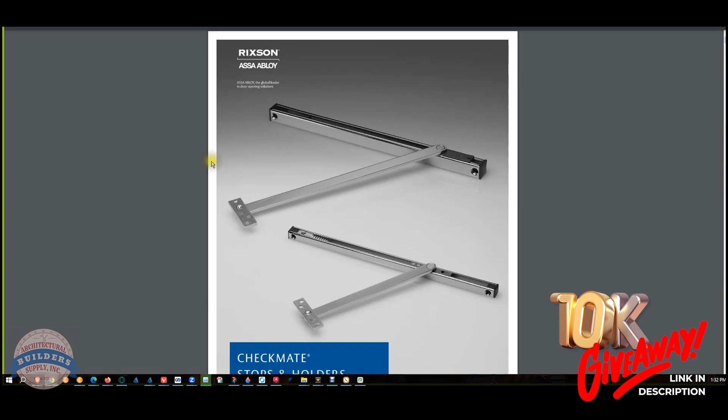Oh, awesome. So, do you want to talk about electromagnetic door holders? Is that what it is? Yeah, that's what I was thinking. Okay. Well, I see these most often in hospitals, and I always think of Rixson for these, but there are many other people that make these. And the Rixson catalog is a really good weather vane, so to speak, because it has not only all of the typical culprits, but it's going to have stuff that you may not find by other people.

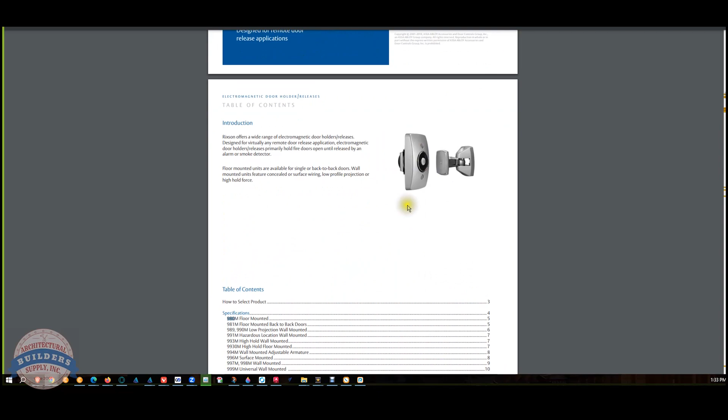So in the Rixson catalog, which is the Rixson manufacturer's page, and then the 2018 full line catalog. Okay, I know them there. We fire that up, 45th page. Here we go. Hager and Rixson and ABH and so many people make these. So when it comes to this stuff, I'm really looking to sell something that's more economical in the sense that this Rixson material is really expensive. There are other people like RSG that make this stuff, and it's not nearly as costly.

So the important application for this material is when you have the requirement of holding a door open, and it has to be connected to the fire panel or some sort of an input, like an ionization detector, like a smoke detector. I've done these where I sold the client a smoke detector, and it was code compliant for what they were doing. A typical electromagnetic door holder is going to be installed, and then there'll be a relay at the fire alarm panel. So if that circuit opens, it's going to cut the power to this, and the dumb mechanical closers are going to do the job of getting the doors closed.

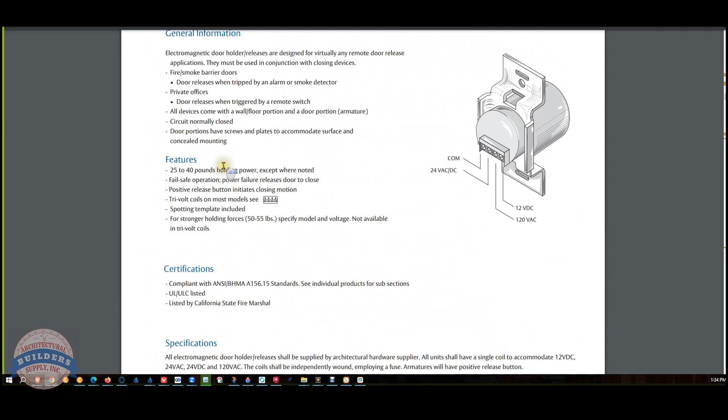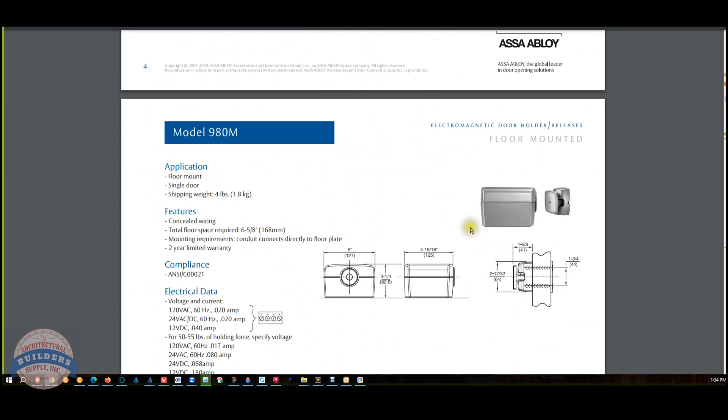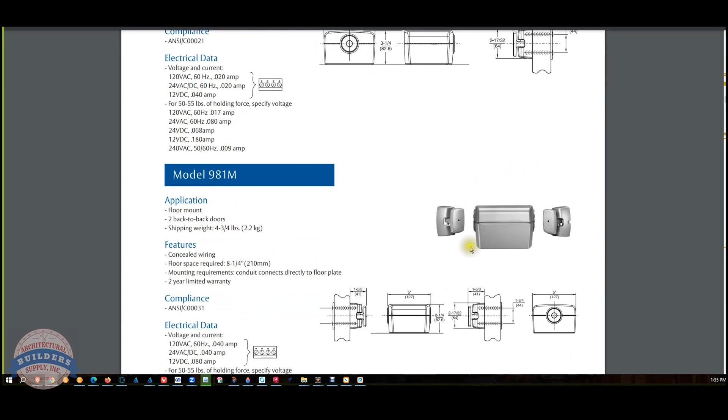And these are really elegant in the sense that they hold the door open. That's all they do. When we look at the catalog, and these part numbers have changed over the years, what really changes it is where you're mounting it. It's almost always to the wall, except when it's floor mounted, like this 980M. The 981M can also be done as a pair of doors back to back. So if you have two pairs of doors, like 4 doors, you can hold those open in the center. But if you're doing these, you're really doing the wall mount stuff.

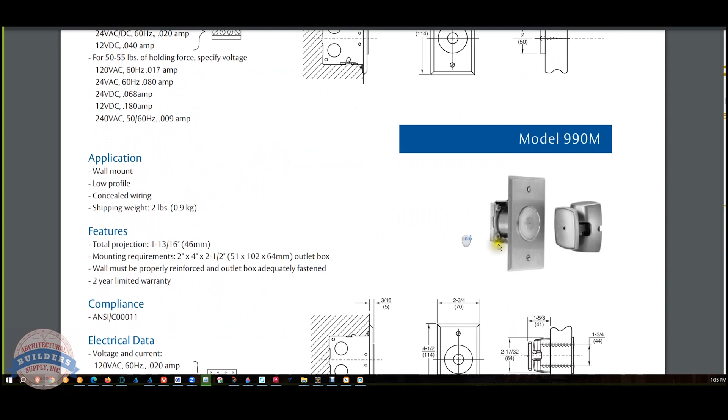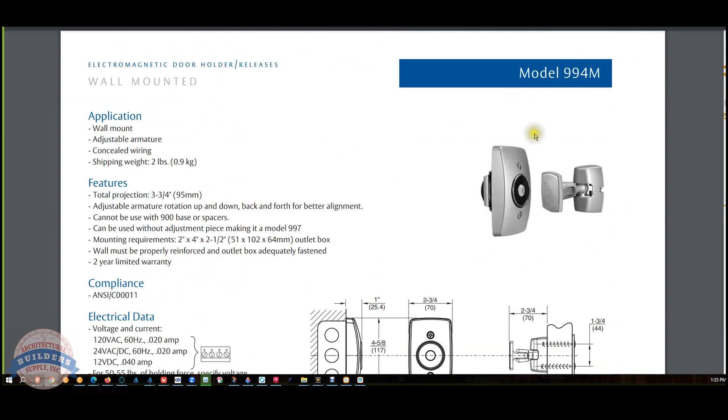So if it's wall mounted, really all that you're talking about is what's the projection off the face of the wall. That 989 is super small. You're looking at that versus something that's going to stick out much greater, like this 991 versus a 994M. That's 1 inch. Or one that has an extension, 2.5 inch on the 996. So when I think of these, I'm thinking about, are you installing it on the wall? And if yes, what projection do you need?

Because that actually really matters in the sense that you have to make sure that you can get the door to the armature. And the armature is going to be mounted generally to the door. Can you bring the armature mounted to the door to the magnet? I imagine that's where there's extensions.

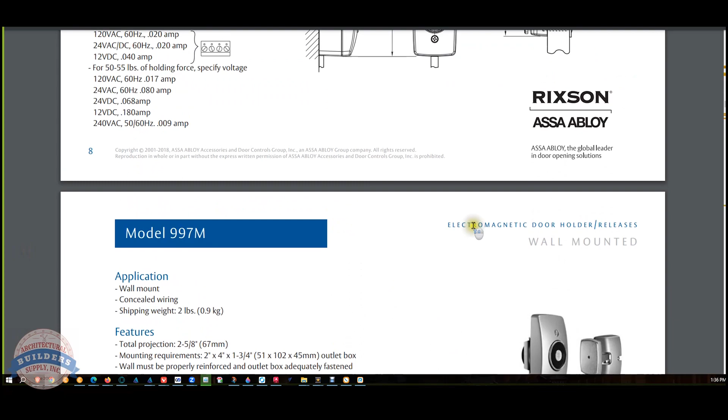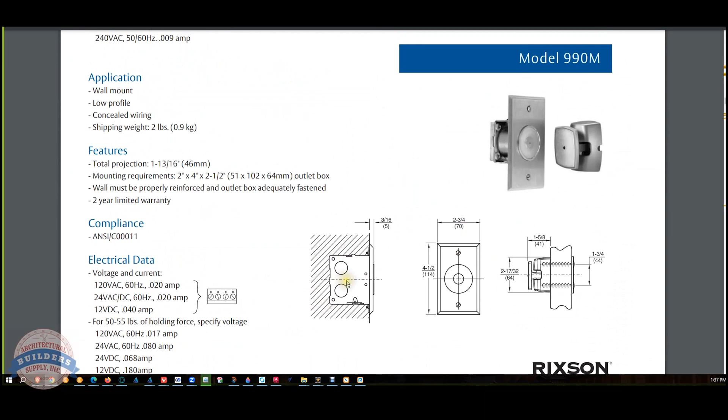Yeah, definitely. I had a conversation with a client, and he had a situation where it was really crucial that he could get the door to 90 degrees, and he had a tight perpendicular wall, and that projection became really important. It was a masonry wall, so he couldn't use anything that requires a box. So it had to be surface mounted. So this wouldn't have worked because he wasn't going to chop a hole in his masonry. Plus the wiring had to be surface mounted.

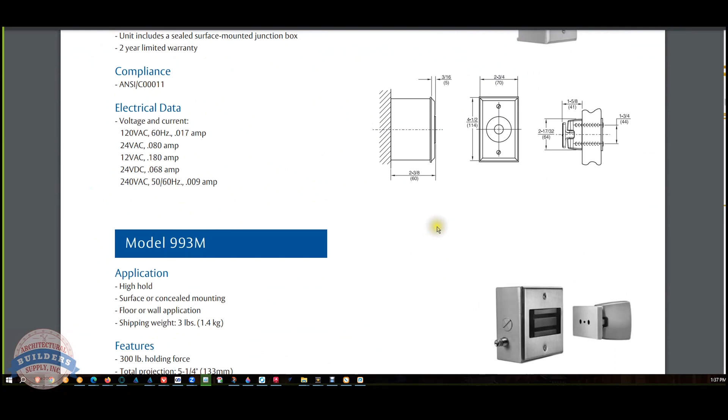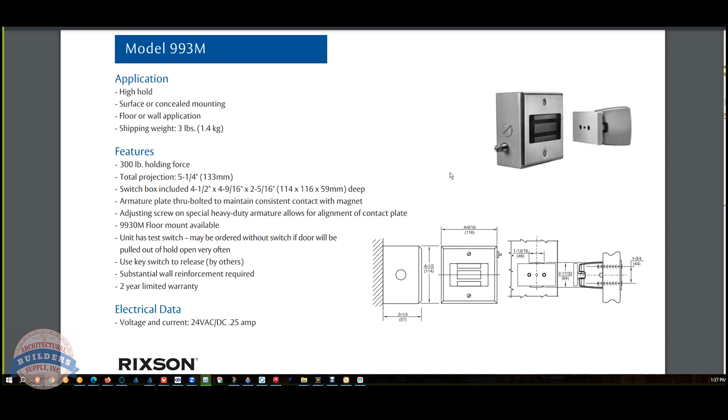So I was able to show him that in AutoCAD he could get to 85 degrees open, which was okay because it's not handicap compliant or anything of that nature. So if you're mounting it to the wall, great. What's the projection? If you're mounting it to the floor, okay. Does it still physically fit? And then when you go back. Oh, go ahead.

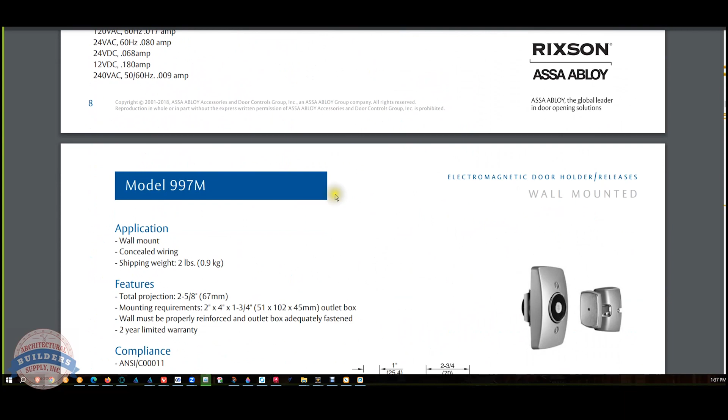So you mentioned the projection, and as we're scrolling through the catalog, you also mentioned the box. So in some cases, it could be recessed, and there would only be a small portion sticking out. But like you said, in masonry, it would have to be completely surface mounted. So that's kind of another question I have to ask: is it on the wall? Is it surface mounted or recessed? Is that accurate, kind of?

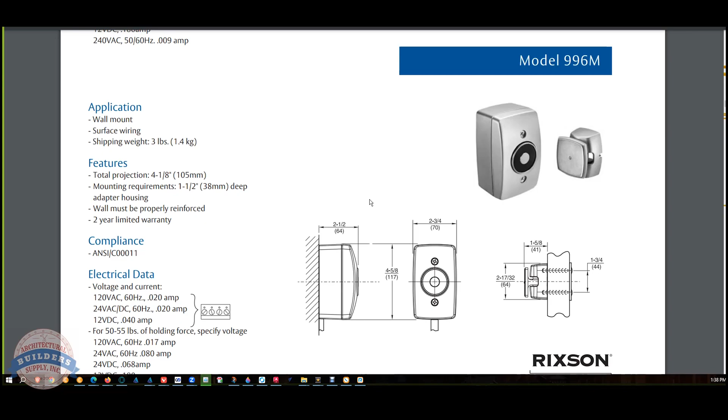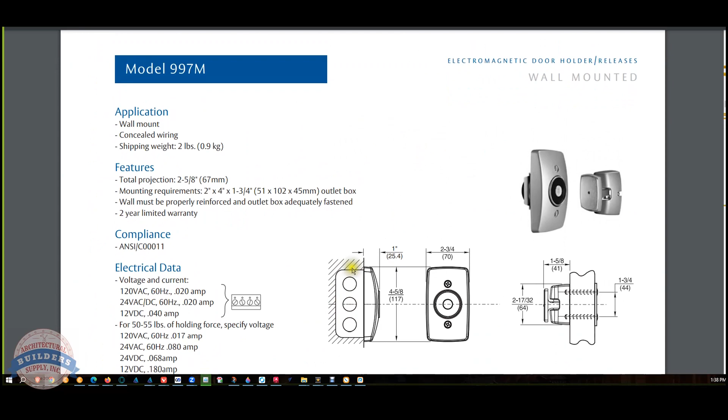Yeah, absolutely. I mean, is there an electrical box that you're installing this into? And the guy might say, "Oh, absolutely. The electrician did all of that." In that case, you'd be looking at this 997M or something like it. Those are the punch outs for the conduit that you see there.

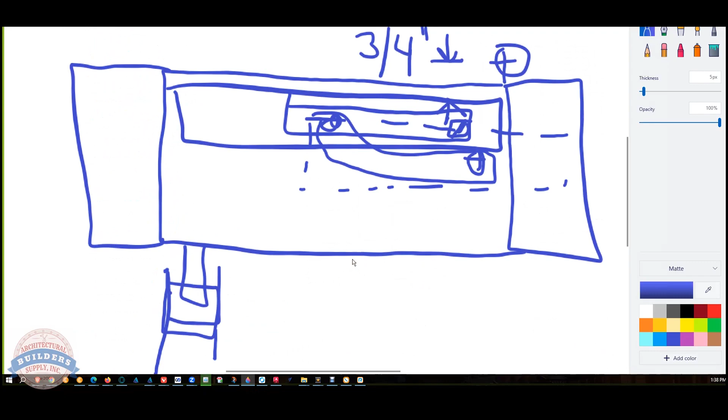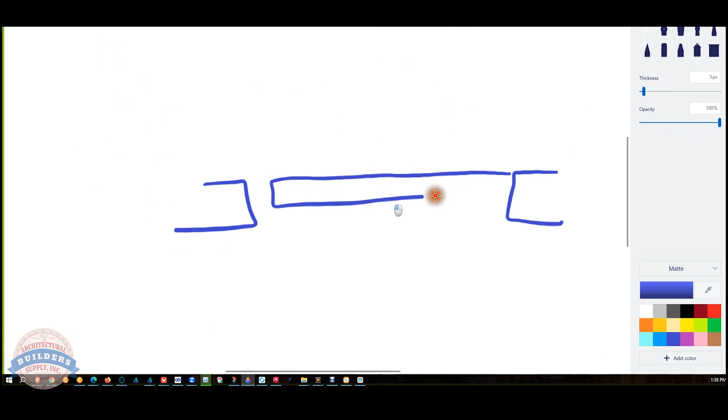Okay. In that masonry wall application, they're clearly inferring that you're surface mounting wiring, and then what it really boils down to at that point is something like this client's application. The door was here, had to swing out. The trouble was he had a wall right here, a perpendicular wall. So when that door goes to open, what's this distance in here? So that's what really had to be looked into.

So I tossed all of that into AutoCAD and found that I could get his door to 85 degrees and surface mount his material here and the armature on the door here, through bolted, and then his wiring was coming. Or he was going to need to do something else. There was definitely a need to tie it into the fire alarm panel. So no matter what, he was going to have to get wires from the fire alarm panel to the unit because it was a fire door.

No, forgive me. On that, it was going to be a smoke detector. And that would be, I don't know if Rixson still makes them. I know that I have one here, and I'll show you what it looks like.

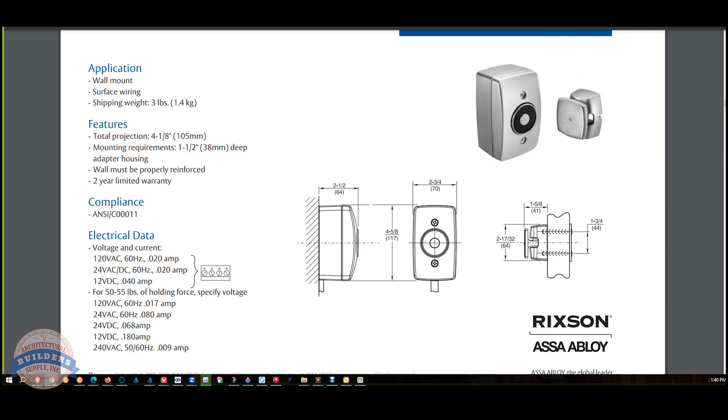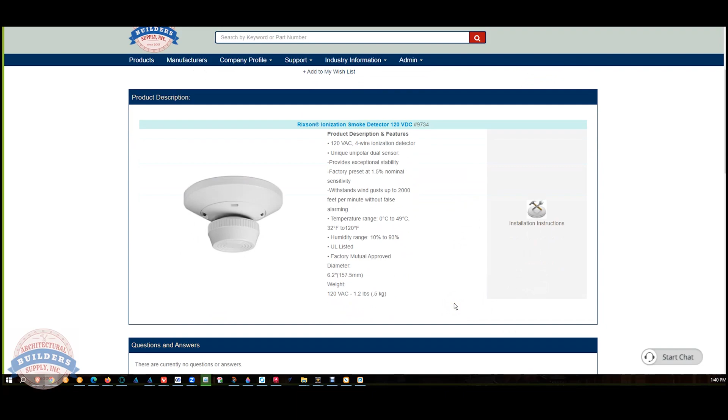You know about the caret above the 6 on the keyboard? No, I do not. Okay. Wait, I think I've seen this somewhere. Yeah, I probably have mentioned it. So when you do a search by caret on the front end, all it's doing is showing you the actual items that are on our actual shelf. Oh. Easy way to know what do I have in stock. I didn't. So, oh man, you've probably told me this. I may not have. I don't share all the Easter eggs right away. I thought this was a feature that we didn't have, and I wanted it desperately, and I mentioned it a while back and didn't bug you about it again. This is exciting. Awesome. This is a great feature. No, you may have been the person who put that in my mind.

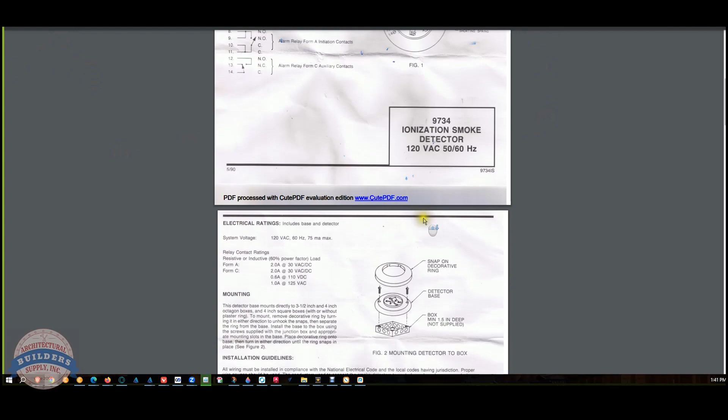So this detector here, you could easily wire this with the electromagnetic holder, and that's certainly what I would have recommended. I know that's what I recommended to the client. And it's an ionization detector, and it's a switch, right? So whether it's a light switch, right here, you see? So this is literally what this is for.

With the electromagnetic holder, the question is, how are you activating it? Meaning, how is the door closing? Is it fire alarm? Or is it some other switch, that would be number 2? Or number 3, is it not required and you're just going to pull the door closed when you're done with it being held open? And I've had people want an electromagnetic door holder for a home. Well, they didn't request an electromagnetic door holder.

So first, electromagnetic. When you run current through a wound wire, the science of doing that produces a magnetic field. So if you were to read an electrical book, here it is. Okay, I want to show this to you. It is liberating.

It's a 400-page book, but really just the first 3 chapters. And from there, a lot of it's extremely well written. A lot of it you can move through, but there are going to be parts that you will continue to go back and refer to. This book, Basic Electricity, I think I bought it on eBay for $12. I bought another one because I couldn't find my first copy. It's here somewhere. So this is liberating when you understand how electricity works.

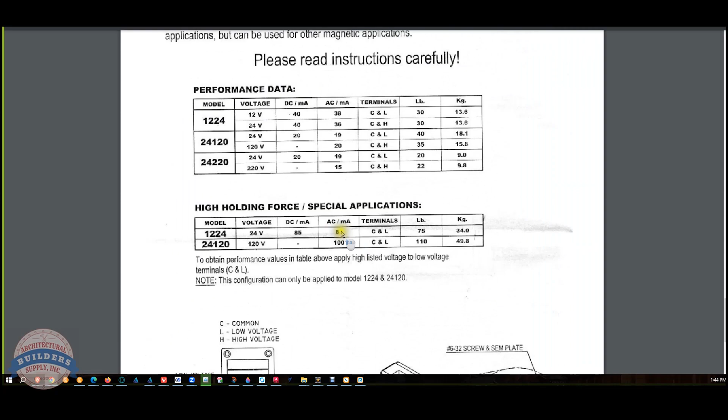I had a client one time say, yeah, I got a big problem. And that big problem is a 110-pound Labrador. And he needed to have a high amount of pounds of holding force. And I said, well, that's no problem, because I said, can you run electricity to it? He's like, sure, I can do anything I want. And I then showed him something like this RSG, because it shows holding force dependent on voltage.

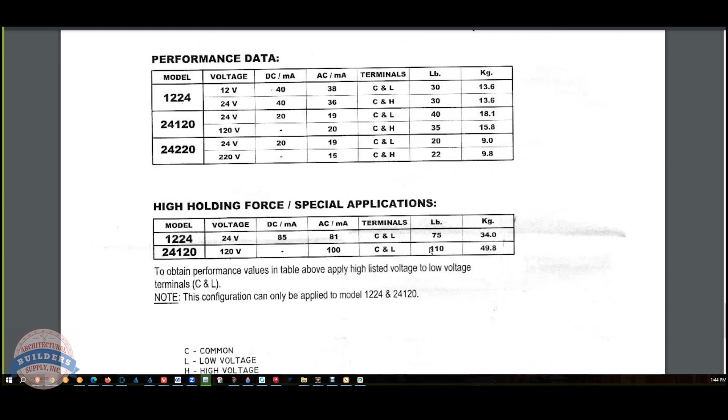So is 40 pounds of holding force adequate? If not, go with this model, the 1224, run low voltage to it, and you'll get 75 pounds. You need more? Is your Labrador really that strong? Go with the 24-120, 110 pounds of holding force. So that's another thing to consider when you're doing these, because it's going to come down to how you are installing them in terms of where, floor or wall.

Then, what voltage does your client have available? Can they do line voltage? If you don't have to transform the power down, save yourself the extra cost. If you've got 110 volts at the opening, I say just use that. And you can buy all these tri-volts, 12, 24, or 120. They will operate on line voltage, and they'll operate on low voltage, AC or DC.

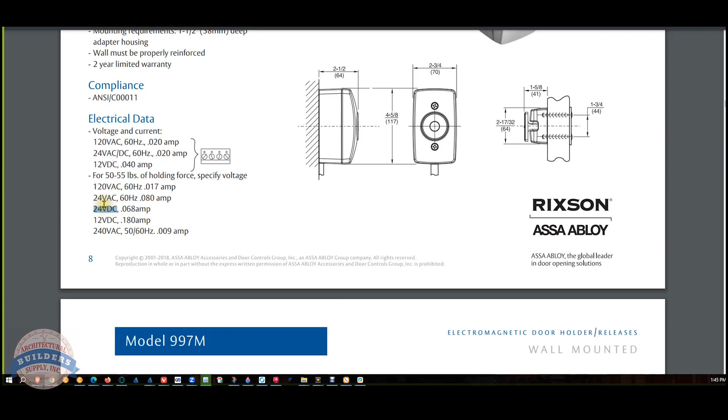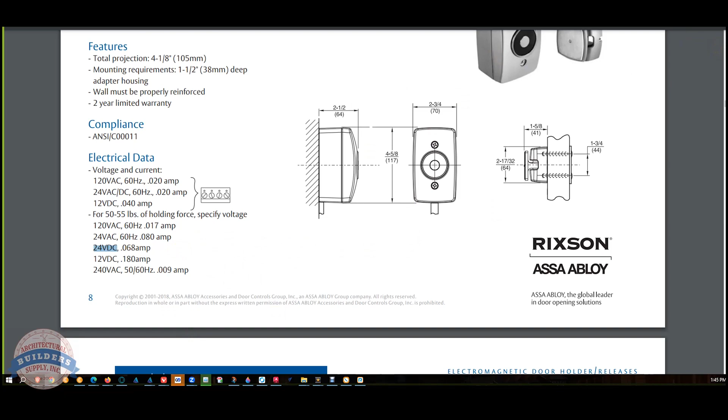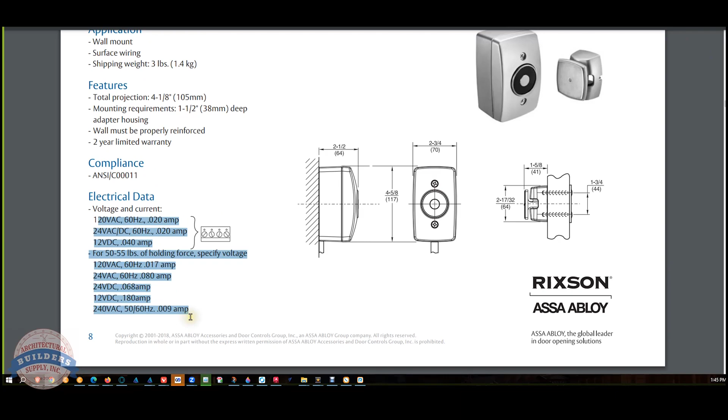What's really neat about that is they must be rectifying. No, I don't know how they're doing it. Yeah, they must be rectifying it, and the rectifiers are in that book as well. Because if it was AC, you would hear the buzzing like a doorbell or like an AC electric strike. Right. So the next question is what voltage do you have available to you? Go with the easiest one, but be mindful that the science behind that does give you some different holding force amounts, and that may be an issue.

They may need a higher holding force because you've got a door closer on there that's really pulling at 12 pounds. So holding force could be really important, Cory, because you may have an environment where people do tug on the door or door closer. You need to be mindful of that, because a large dog that reaches up on the door will push it open at these lower voltages. So there is the consequence of holding force compared to voltage. So be mindful that exists. Nobody ever thinks about that, but it's a thing.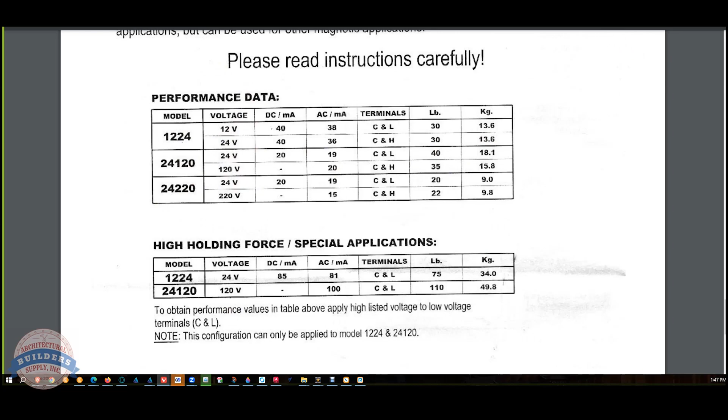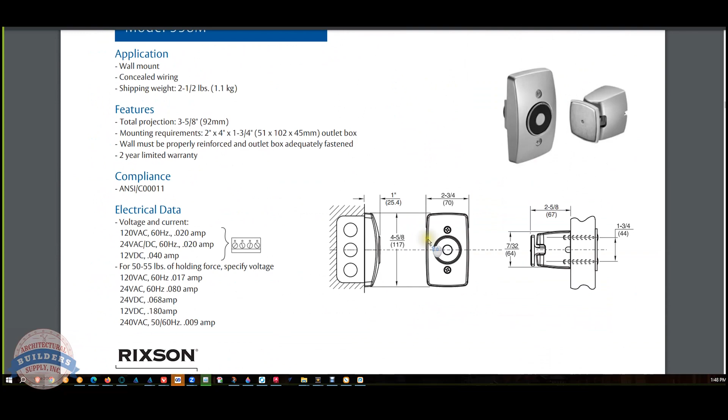After that, in the Rixson catalog, you had mentioned earlier about extensions, and yeah, you better believe it. And zip ties, according to the nerds in our industry, are not fire-rated ways to extend this material. Now, I imagine there's a story there. Oh man, if you nerd out with the DHI guys, that's like a 30-minute detour that'll be taken in a class about zip ties and electromagnetic holders.

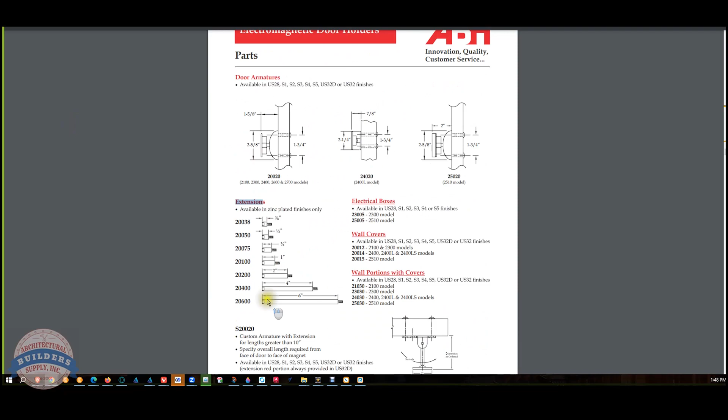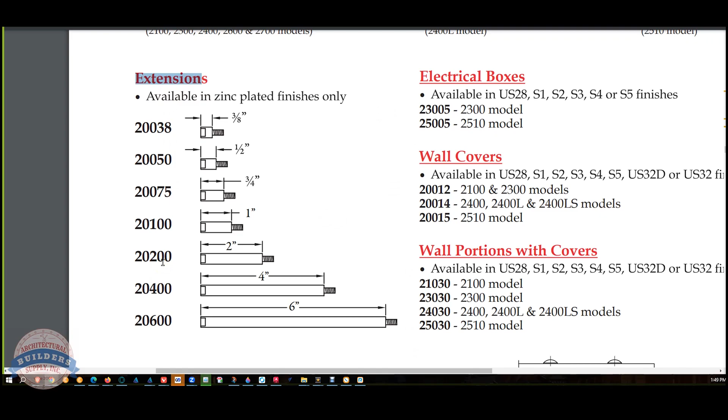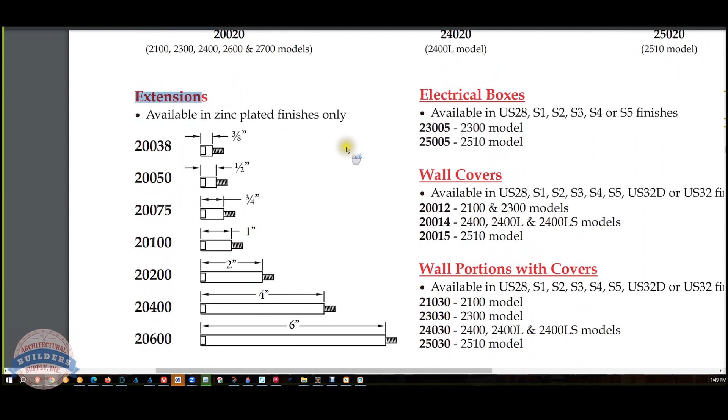Shaw from ABH, when I first met him about 1991, he had just left Rixson as one of their engineers, and ABH was therein born. So when you see part numbers at ABH that are like 0128 and Rixson's part number is 128, yeah. So this is all really important, and all of this stuff obviously connects together.

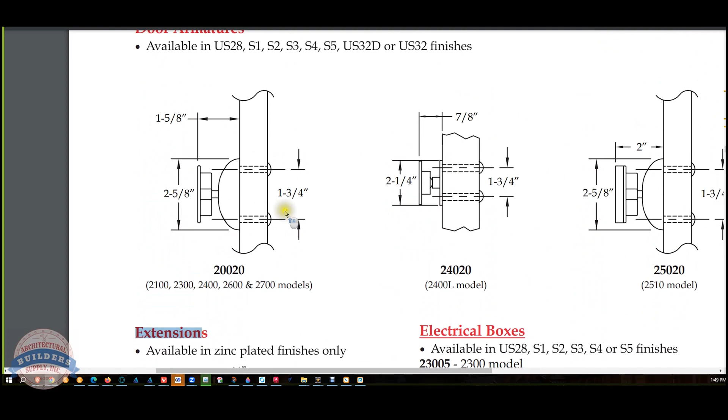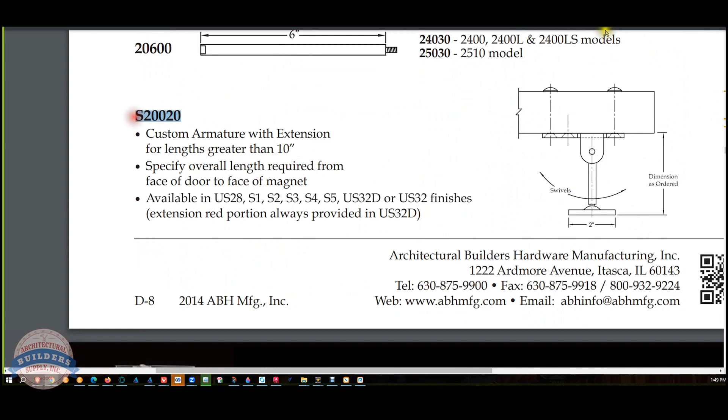And the female part here connects to the back of your armature, so that you're basically going to take these armatures and you're going to increase the distance from 1 5/8 to whatever by adding these extensions. They also have the S20020s, and this is where you specify. If you search in our site for S20020, you're literally going to find that we've got them added in lots of lengths. So here they go, 11-inch, 12-inch, 13-inch. Okay, you get the picture.

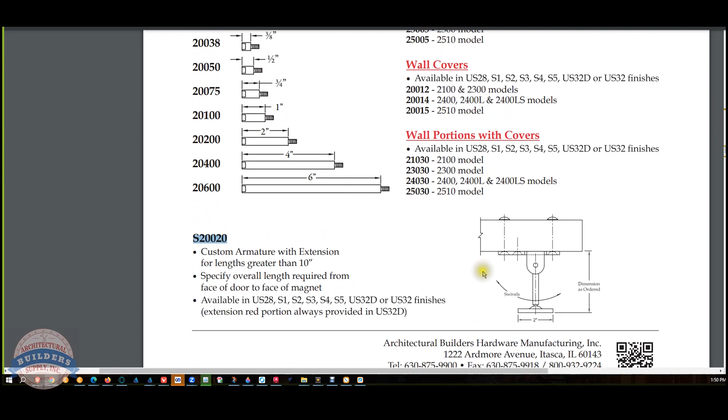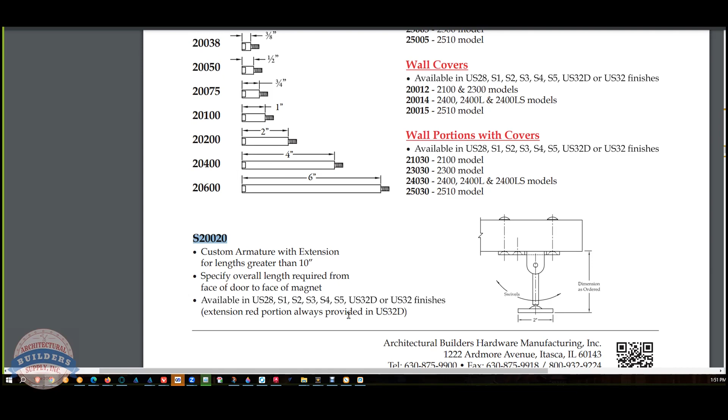So I really think of ABH a lot when it comes to these because their page is so easy to understand. So when it comes to extensions, this is it. You've got to figure out exactly what needs to happen regarding that. And outside of that, if it's a fire door, as long as they close when they're supposed to close, meaning some means of opening the circuit or cutting the power, fire alarm panel, or that detector. The detector may not be code compliant, but that's all that there is to these.

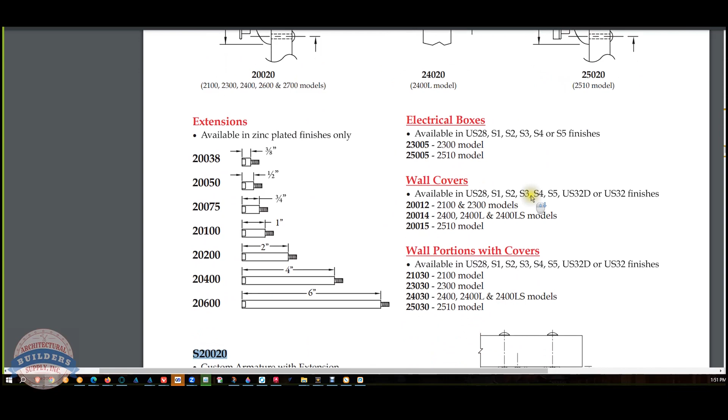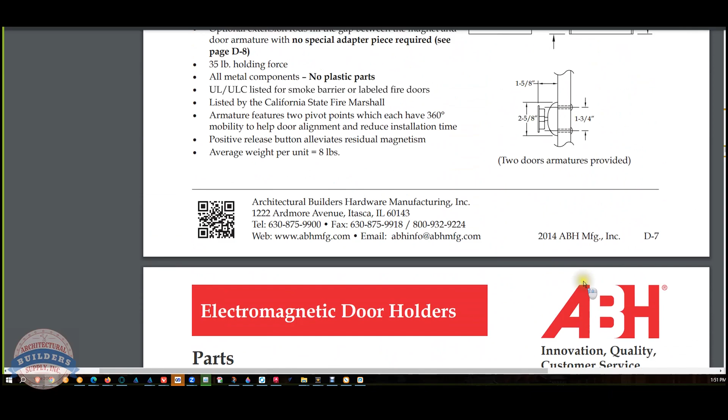Now, we don't sell them very often, like new on new construction, but we sure do sell parts and the armatures and stuff that they need for an existing installation. All right. It sounds like I should probably try to find a copy of that Basics of Electricity, because for me, that is one of the most daunting things. It's like I'm just not sure.

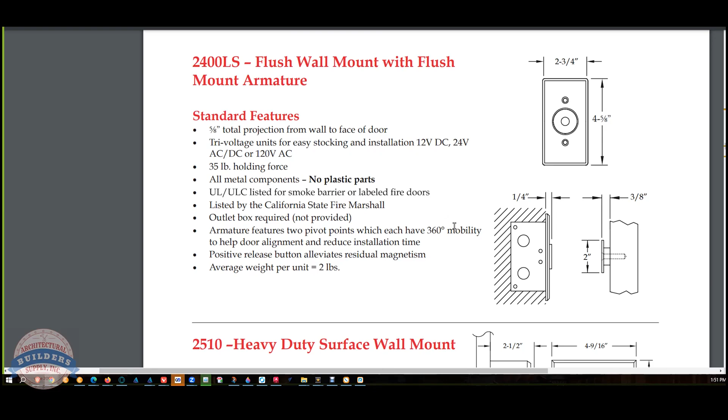Do you read at bedtime? Not really. I gotta get my kid to bed. I usually go to bed when he does. I try to, though. I get it. Well, no. I was there at one time. What I force myself to do is to turn one page. I'm on President number 25. I'm on McKinley right now, and I force myself to turn one page a night. You'll get to a part in this book where you'll say, wow, this is crushing my soul. Get to another part that you're going to go back and read 5 times. And I believe you fully.

I've been there. This book, I believe, was written to be a Navy training manual or something like that. But there will be pages that are going to be very liberating, because you'll say, oh my gosh, I now understand the difference between amperage and voltage. I've gotten halfway through the book for sure, but then it spends a lot of time in AC, and I don't need to know the science of AC and motors at that level. Plus, it really helped me learn about transformers and how they work and how power gets from the nuclear power plant to my outlet when I plug in my Google Home Nest. Right. There you go.